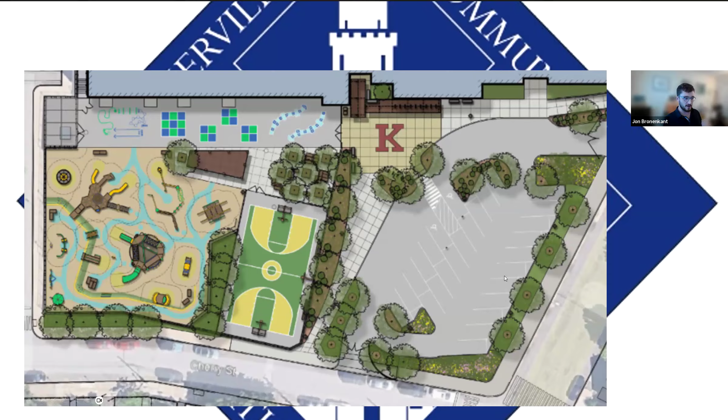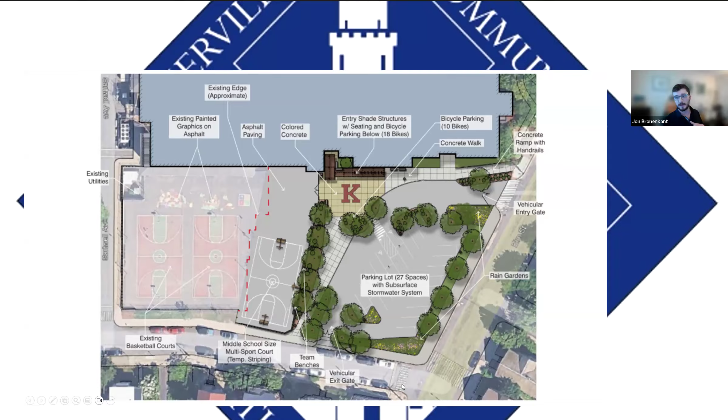So this is kind of the full design that we came up with for the project. And then this map just shows you a quick understanding of what we're doing during this first phase. You can see revised bus drop-off parking, new entryway into the school with graphics, new shade structures, bike racks, a temporary basketball court, tree plantings, and a lot of green infrastructure.

So I can show you some photos of what the construction looks like as of today. Right now it's a big dirt lot. We are doing the fine grading of everything so that we can put and pave the asphalt. Next week, we're putting asphalt down and putting in some retaining walls over the next 2 weeks of the project.

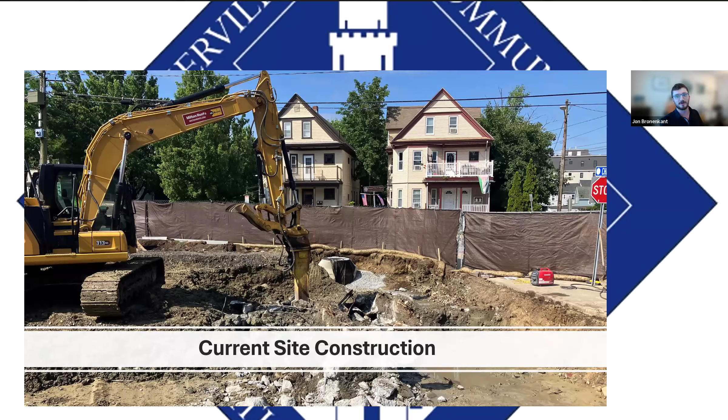Here you can see we found the old Kennedy School, right where we needed to put a lot of green infrastructure down. So we spent about 3 days removing a corner of the old school and some stairs, some cool archaeological finds. This is that green infrastructure that we had to then put into that corner, helping reduce flooding events like we just encountered today.

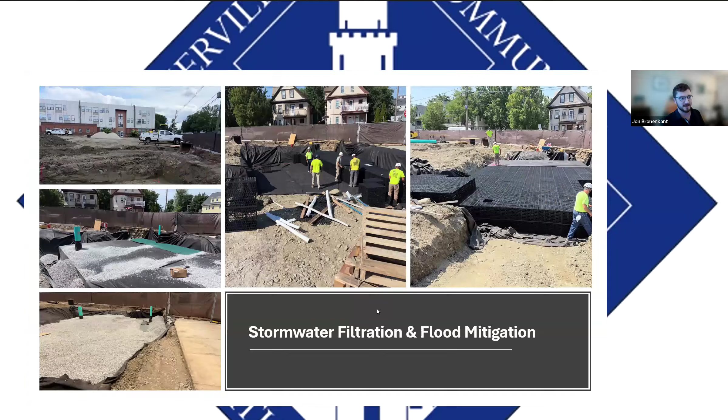And then this is that same structure that you can see here that I am standing on at this point. Oops, sorry about that. I'm standing on it and looking towards the school.

So again, we're working with Classic Site Solutions. They're amazing to work with and really have no complaints. And we are on schedule with that phase of the project.

So funding: our current CPA request was for $3 million. We have $1.4 million of that in fiscal year 26 CPA funding, and then $1.6 million of that coming from bonding. And what we are looking for as an additional request is an additional $1 million on top of that $3 million already granted, so asking for a total funding request of $4 million.

I'm sorry, this is a little bit small for you, but this is just the budget cost spreadsheet that you all have included in your packet, breaking out that $4 million request into what we estimate the project to be: site preparation, playground features, hardscape elements, green features, and site furnishings.

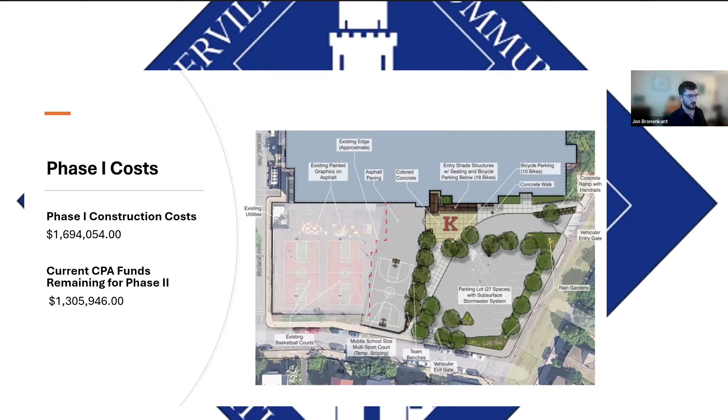So talking about costs, the first phase of this project cost us about $1.7 million. That leaves us about $1.3 million remaining in our pot of $3 million granted to us right now. And we feel currently that that is a little bit tight to finish the remainder of the project.

So in the remainder of the project, like I was talking about before, we need to complete the installation of the basketball court, do seal coat graphics on that, install shade structures, trees, do a lot of pour-in-place and mound up different surfaces to reach these different structures. The structures themselves are going to cost about $650,000, and that's just for the delivery. I put $1 million in the cost spreadsheet because that's what we estimate the installation of those products with all the correct foundations and whatnot.

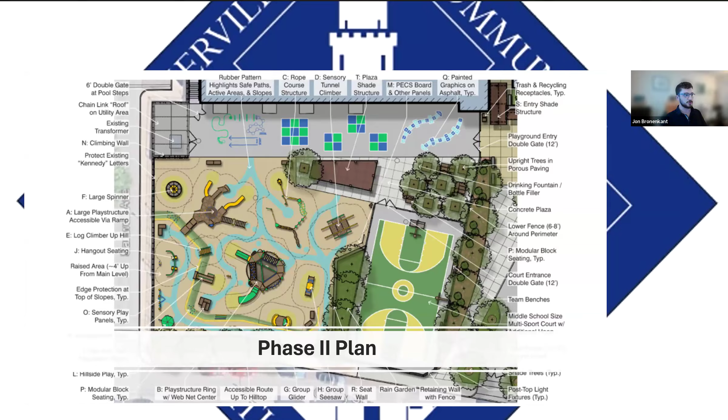So there are a lot of expenses that are still unknown on this project, but we do know some elements of it. And knowing some of those, there are some concerns about only having $1.3 million. And thus I'm coming to you for that remainder.

So just a breakdown of the final timeline of phase two and what we expect from September on.

So the first phase of this project will be complete at the end of August, with some remaining tasks done in September. Then we will take a break to allow the school to conduct their normal business. They will have 3 basketball courts and an expanded playground area, fully fenced off for them to use all fall and part of the spring, with construction then beginning, we estimate, in May.

So what we hope to do is put the project out to bid in late December, giving it a long bidding process, knowing there are some holidays in December. Following that bidding process, a contractor will be awarded the bid in early to mid-February. Again, in May, that project will actually begin and go all the way through summer, ending in late August, for a new playground to be open for all students and faculty at the start of the school year, kind of late August, early September.

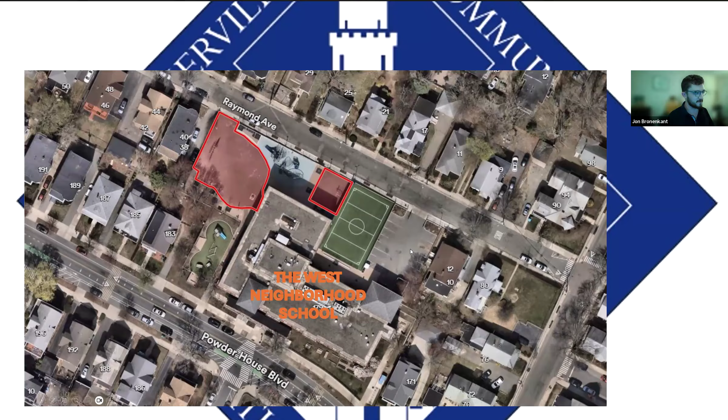It's custom stuff we've done at all of our different schools. What we're trying to do here is paint a half basketball court with four square in this top area, and then have a kickball diamond with some other games that the school helped create during the community design process, including racetracks and whatnot.

CBA Landscape Architects created this original design that we still have, along with the specifications. So we are ready to put this project out to bid if we get funds.

It helps reduce the urban heat island effect because it paints the black surfaces a lighter color. It's really fun games, it's great activation of the space, and depending how you paint it, it can be helpful for teachers to organize lineups, recesses, and other events where you need kids to line up in an organized fashion.

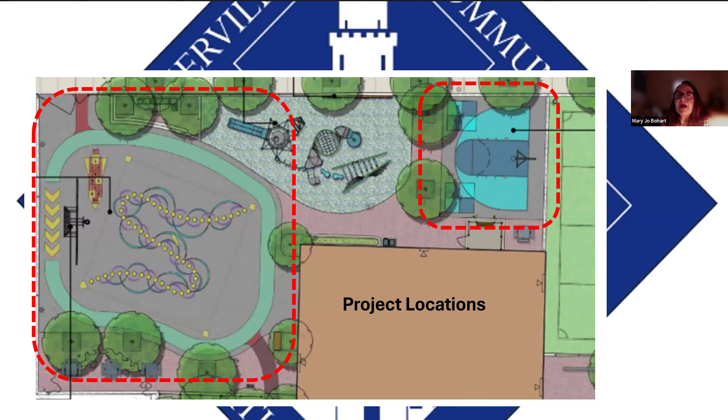John, when it fades, is it tricky to put something else on top of it? Years from now, when something else is needed, how do you wipe the slate clean? Yeah, so you just paint a new layer of base coat, seal coat, on top of all the old graphics. There's also a kind of leveling liquid you can spread that's like a tar, so if you have a lot of cracks in the surface, you can use that liquid to help create a new level surface.

Alternatively, if the asphalt is in disrepair like the Kennedy School is right now, with 30 years those graphics have been on, and the asphalt is undulating so much that no one really wants to paint any seal coat graphics on top of that, they would ask for a mill, or over mill, and repave of that area.

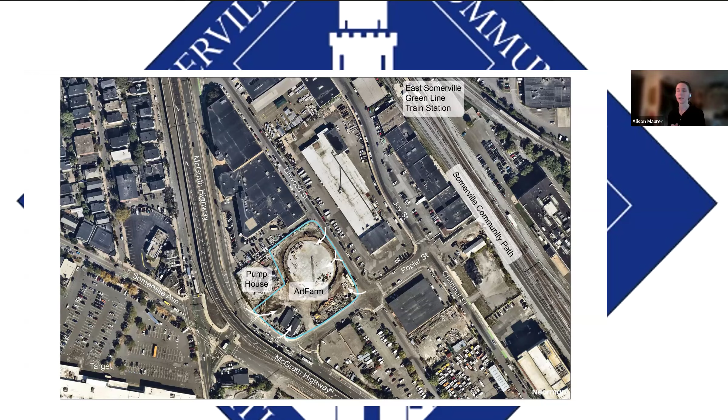While we're on this aerial, I might just note to you all, take a peek, note how many trees there are in this aerial photo, note how many parks there are. This is an area with little of either. So in a city where acquiring 1 acre of land costs over $17 million, building a new 1.33 acre park is a once in a generation opportunity. Art Farm will be one of the city's largest parks, transforming a vacant lot into a unique and vital destination for play, art, nature, and climate resilience.

It's doing a lot, but some of the project goals, there are many of them. One of the major ones is this is an investment in an area of historic disinvestment, an EJ neighborhood, and it will be the first public open space in the Brick Bottom neighborhood. Beyond that, Art Farm has been in the vision of the community since 2014, so this is a long-standing community desire. It is necessary that it have an arts focus that recognizes the nature and character of the Brick Bottom neighborhood.

It's supposed to be a shared agricultural resource, which you'll see in a little bit of the project history, as well as what we envision for the future. A hub for community connection and thus community resilience. It's supposed to be very flexible, so it can accommodate lots of different kinds of events and programs.

It needs to be a regional destination that draws people into this remarkable community in Somerville. Built into the site, on top of our massive, remarkable stormwater infrastructure, will be climate resilient design managing stormwater in rain gardens, increased tree canopy. There's over 150 trees in this design, pollinator habitat, and importantly, relief from heat. This is one of the hottest zones in Somerville, as you might notice from all the asphalt.

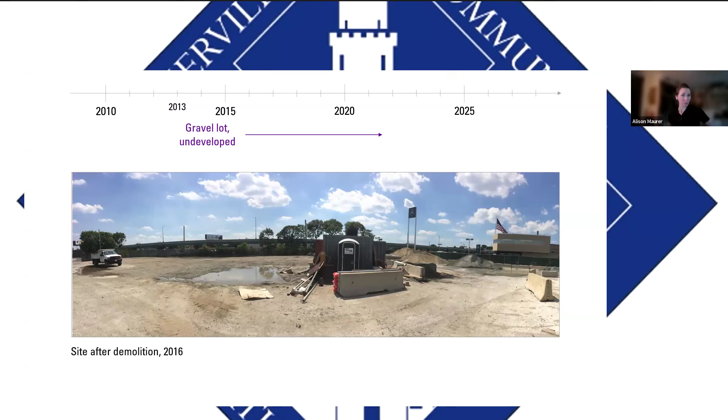The site after demolition was, in most part, a vacant lot, partly storage, but the community and the Somerville Arts Council programmed it, enlivened it with lots of different events from 2013 and in that era. There was a greenhouse installed, beds built. This area was lively, even though it was sort of generally just a flat open lot.

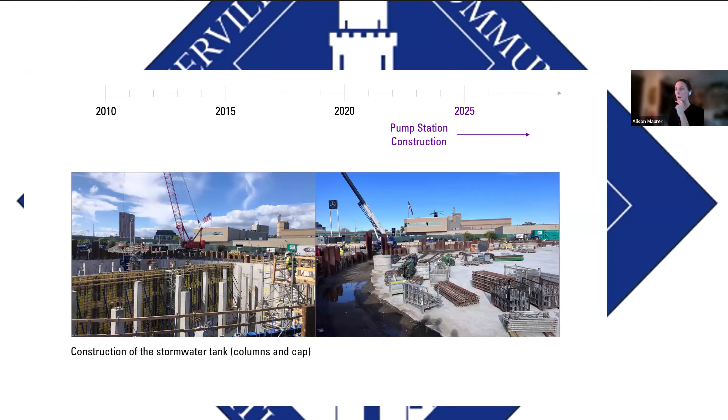We then started building the pump station tank in 2023. This is a photo of that excavation. It goes down about 40 feet. That tank got covered up by a big cement cap. Those are the columns from the inside. That's a photo from inside the tank, which I think is really just pretty exciting.

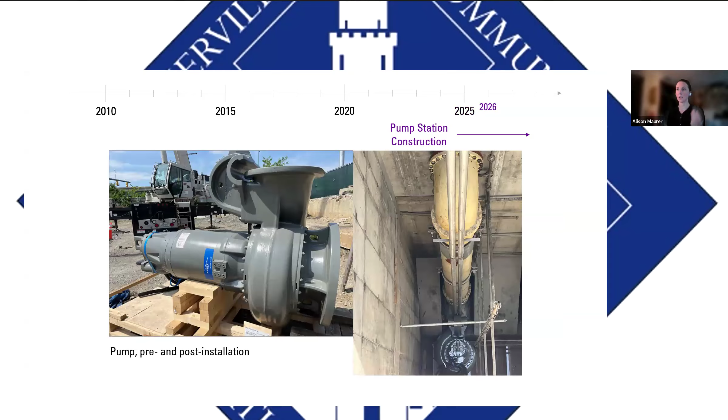The pump house vault has been the most recent work, and the pumps just went in, in 2026, so they're making good progress on this project. Pump installation was completed in June. Culvert installation is going to connect the pump station to the sewer lines and the rest of the city, I think, in late summer. And the tank at this point has been backfilled over, so that part is complete already.

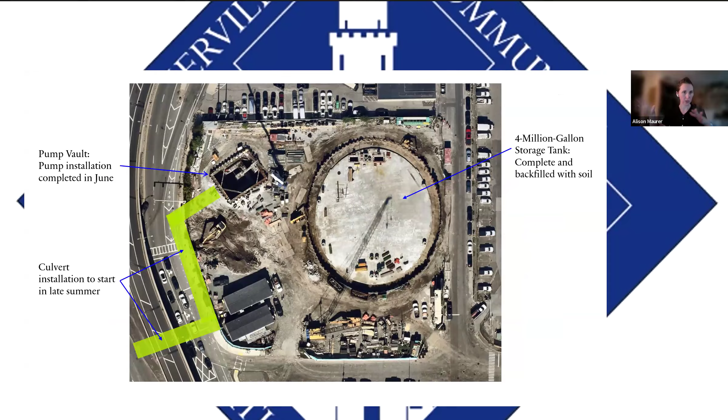With pump station work significantly underway, we turned back to look at the design. This design has been in the works for many, many years. As I said, the community's been trying to envision this project since 2014. We knew, however, that the picture of the city, the financial picture, had changed. And so we were no longer able to build the nearly $11 million park that we had envisioned, that included a large barn structure. That was in our 2023 CIP.

We needed to make some changes to integrate a lot of the arts functions that were going to be in that building into the landscape itself. I'll show you some pictures of that. We've been working on a new round of park design with another round of public engagement, public meetings, a lot of focus groups with experts in the arts, community members, all of those things. And we're here in mid-2026.

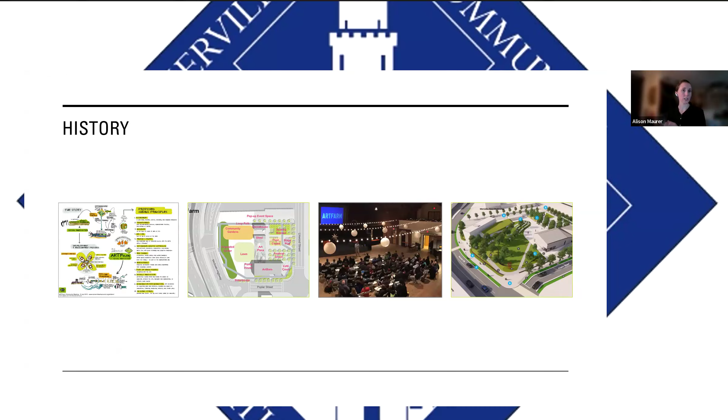I just want to sort of pay homage to the work that's come before us: many community meetings, a lot of very passionate, engaged residents and staff members from the Arts Council, from PSUF, engineering involved in the pump station design, have produced a variety of iterations, and we're trying to carry forward the spirit of that project as best we can.

So where we're going next is we're looking to release the bid. We're completing the design drawings. We are currently at 90%. We're calling it draft 100% construction drawing. We're looking to release that bid this winter and then start construction next summer.

The reason for that is that pump station construction is estimated to be completed next summer. We're hoping those can overlap just a little bit, but we can't start park construction until the pump station is substantially complete, or they would damage what we built and we'd have to build it again.

I want to note this is a really interdepartmental project, which makes it fun and exciting. PSUF is working on it, and Louisa has been involved since the very beginning. We also have what is now Arts and Culture, formerly the Somerville Arts Council, involved since the start. Michael Rosenberg is my main collaborator now, and I'm working closely with Dan Amelin in engineering, the project manager for the pump station, to make sure these align and to see if parts of the Art Farm project can integrate into the end of pump station construction. We have a substantial team already at work on this.

Our landscape architects have been involved since about 2016, and Stantec since around 2021. There's already a very big engineering contract underway on the pump station, so we'll be sort of subsumed by that, and then we'll hire a landscape contractor through a competitive bid process this winter.

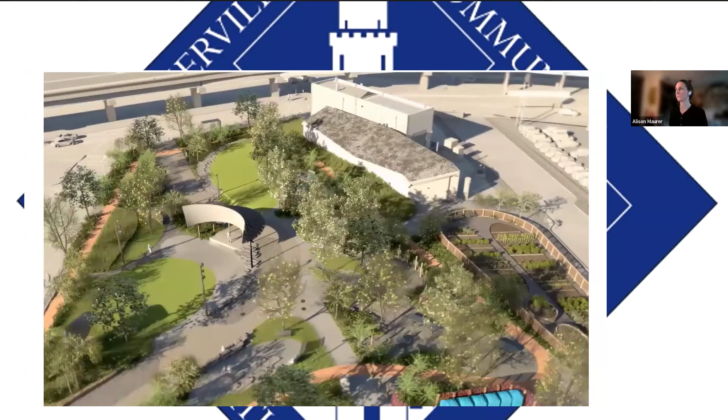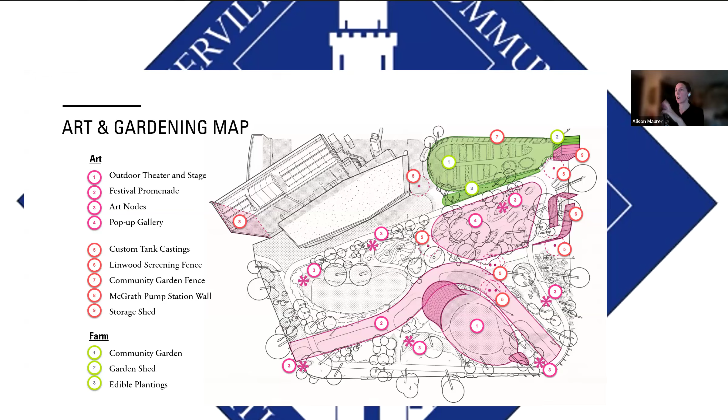We're integrating as much arts function as we can into the landscape, from places to install sculpture to spaces for performance. That includes a lot of electrical outlets as a base need—that's what the community is asking for, since we could do a lot of different things if we just have electricity. But we've been thinking about how art can integrate into as many components of this design as possible.

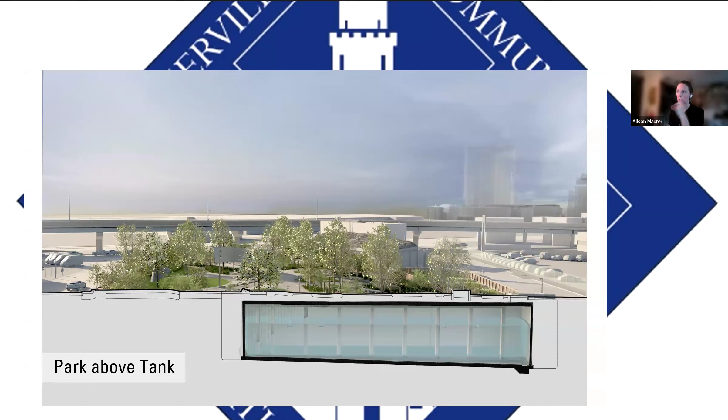This will all sit on top of the tank. So just to give you a quick visual of the tank potentially full one day, all underneath the functions of the park—a great educational opportunity for us there.

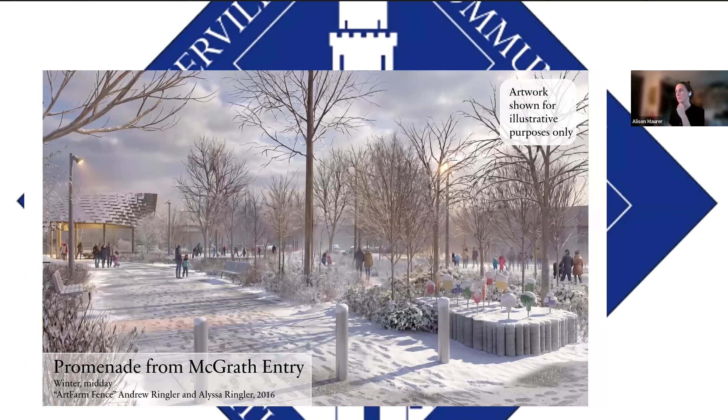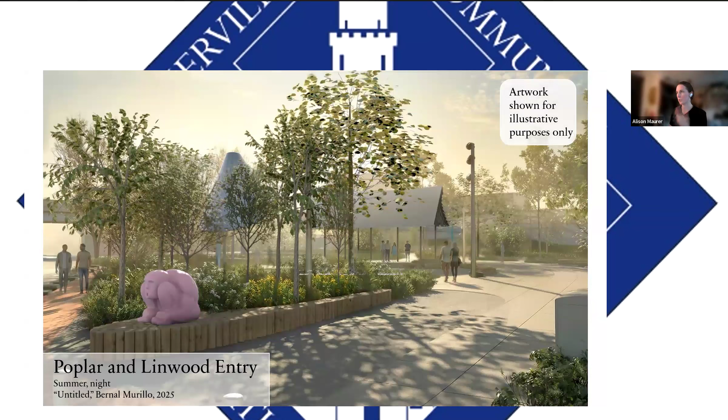A couple renderings of what it might look like if it was lively. This main promenade could work for festivals and fairs, and in the wintertime we hope to have it still be a lively landscape. The community has discussed options for small pop-up galleries on the promenade—it's large enough to accommodate that kind of exhibition space—plus sculptures that could be installed on seating walls.

On the funding summary: we originally came to the CPC in 2018 for funds for Art Farm. We asked for $1 million, which at that time was 25% of the anticipated total project budget. We were approved a certain portion of that from current funds, and the rest was to come from a bond request.

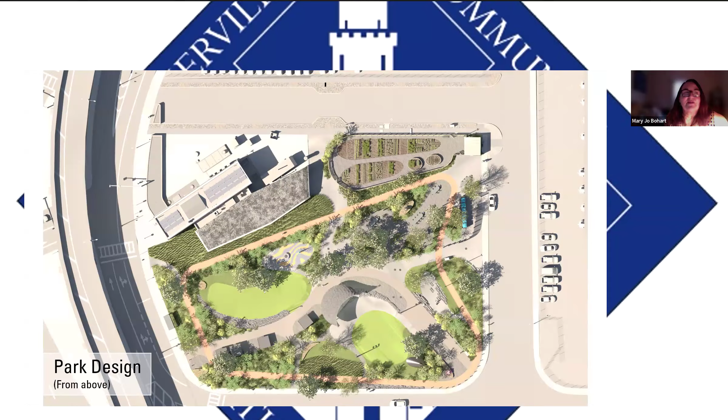It looked to me like its role is to relieve flooding, because this is a part of the city that gets so much flooding. I guess it's combined storm drain and sewer. And yet, when you spoke about culvert and connections, you only spoke of sewer. So I guess my question was, was that a misstatement, or does the tank hold sewerage?

No worries. This is also supposed to reduce flooding in 60% of Somerville, so it is not just managing stormwater from the Brick Bottom neighborhood. It is a large part. The reason it can potentially provide that much storm overflow relief is because it's a low spot topographically in the city. A lot of things flow to that end of the city.

No, that is why there is a pump. So the pump is going to take water that was flowing down, pump it up, and then it will drain out at the MBTA. There's a drainage system under the MBTA tracks that will release that water. Got it, so yeah, thank you.

Yeah, thanks Mary. I can pull up images again, but I thought maybe it was useful to stop sharing. Just let me know if you want to see anything else. Okay, great.